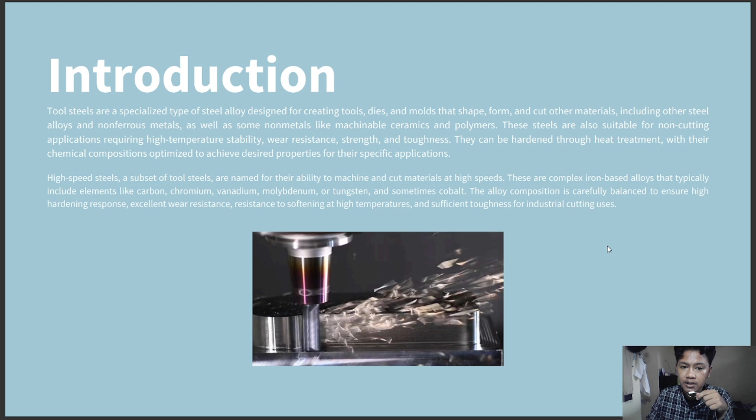High-speed steels, a subset of tool steels, are named for their ability to machine and cut materials at high speeds. These are complex iron-based alloys that typically include elements like carbon, chromium, vanadium, molybdenum, or tungsten, and sometimes cobalt. The alloy composition is carefully balanced to ensure high hardening response, excellent wear resistance, resistance to softening at high temperatures, and sufficient toughness for industrial cutting use.

The modern development of tool steels began with Benjamin Huntsman, a clockmaker from Sheffield, England, who in 1742 developed the crucible melting process. This innovation enabled the production of cast steels, with carbon levels between those of cast iron and wrought iron, allowing the steels to be hardened through heat treatment. By the early 1800s, these steels were the best available for cutting and machining other metals.

A significant advancement occurred with the Taylor-White steel, which could retain hardness at the high temperatures encountered during metal cutting, demonstrated at the Paris Exposition of 1900. This tungsten carbide alloy allowed for higher cutting speeds, feeds, and depth, making previous tool steels obsolete. This breakthrough spurred metallurgical research that led to the development of many advanced steel grades used in tooling worldwide.

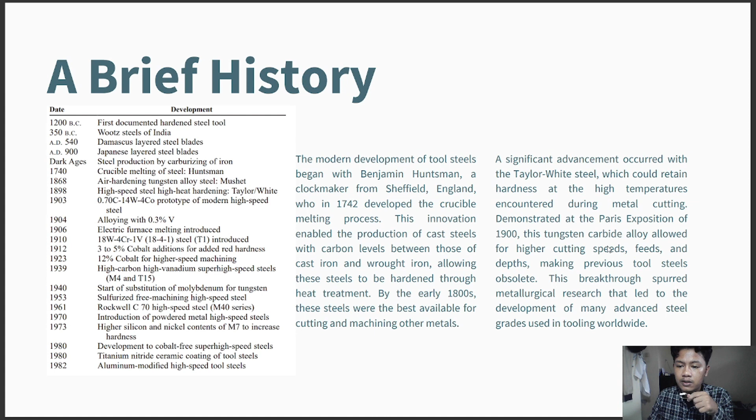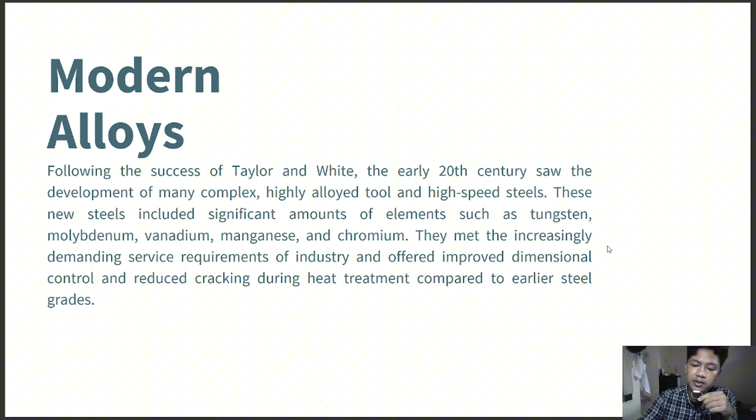Modern alloys. Following the success of Taylor and White, the early 20th century saw the development of many complex, highly alloyed tool and high-speed steels. These new steels included significant amounts of elements such as tungsten, molybdenum, vanadium, manganese, and chromium. They met the increasingly demanding service requirements of industry and offered improved dimensional control and reduced cracking during heat treatment compared to earlier steel grades.

First is tool steel properties. Modern tool steels are characterized by an exceptional combination of attainable hardness, red hardness, toughness, and wear resistance. Attainable hardness is the capability to reach a specific level of hardness through heat treatment. Red hardness, also referred to as hot hardness, is the capability to retain hardness at elevated temperatures. Toughness is the ability to resist breakage, chipping, and cracking under impact loading. Wear resistance is the ability to resist the effects of abrasion and erosion normally encountered by contact and interaction with an outside source.

2. Grade classifications. There are presently more than 40 classifications of high-speed and tool steel alloys according to the American Iron and Steel Institute, or AISI. For example, the AISI classification system designates that M-series high-speed steels contain molybdenum as the primary alloying element. In the T-series grades, tungsten is used as the primary alloying element.

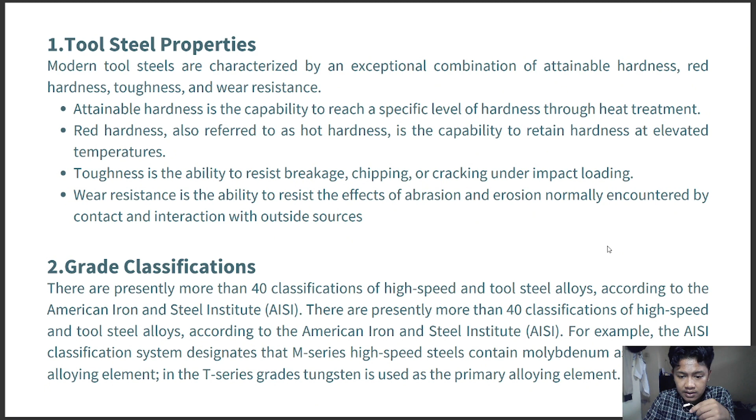3. Tool steels. Hot work tool steels. Many manufacturing operations involve punching, shearing, or forming of metal at high temperature. Hot work steels, Group H, have been developed to withstand the combinations of heat, pressure, and abrasion associated with such operations. Cold work tool steels.

Cold work tool steels, because they do not have the alloy content necessary to make them resistant to softening at elevated temperature, are restricted to applications that do not involve prolonged or repeated heating above 205 to 260 degrees Celsius. There are 3 categories of cold work steels: air hardening steels, also called Group A; high carbon, high chromium steels, also called Group D; and oil hardening steels, also called Group O.

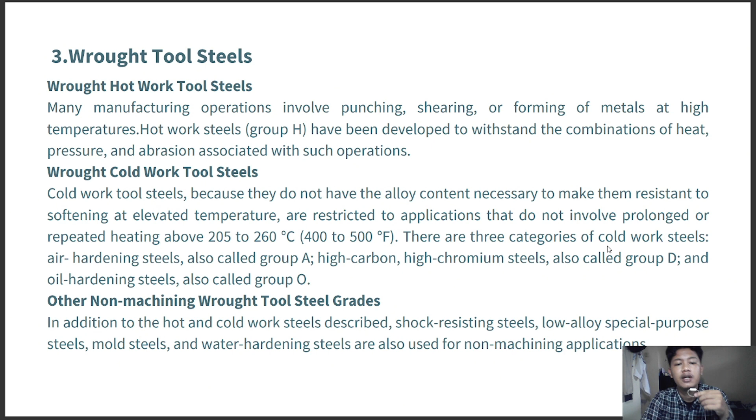Other non-machining tool steel grades, in addition to the hot and cold work steels described, shock-resisting steels, low-alloy special-purpose steels, mold steels, and water hardening steels are also used for non-machining applications.

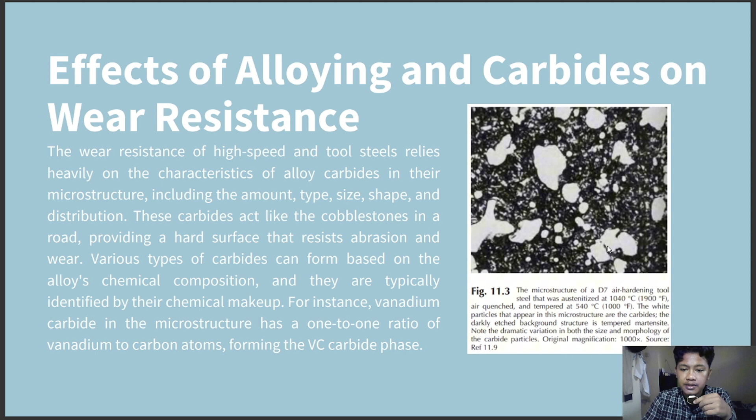Next, effect of alloying and carbides on wear resistance. The wear resistance of high-speed and tool steels relies heavily on the characteristics of alloy carbides in their microstructure, including the amount, type, size, shape, and distribution. These carbides act like the cobblestones in a road, providing a hard surface that resists abrasion and wear.

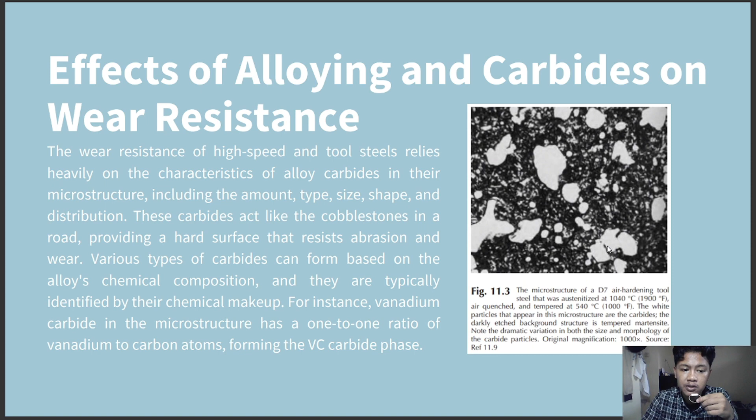Various types of carbides can form based on the alloy's chemical composition, and they are typically identified by their chemical makeup. For instance, vanadium carbide in the microstructure has a 1:1 ratio of vanadium to carbon atoms, forming the VC carbide phase.

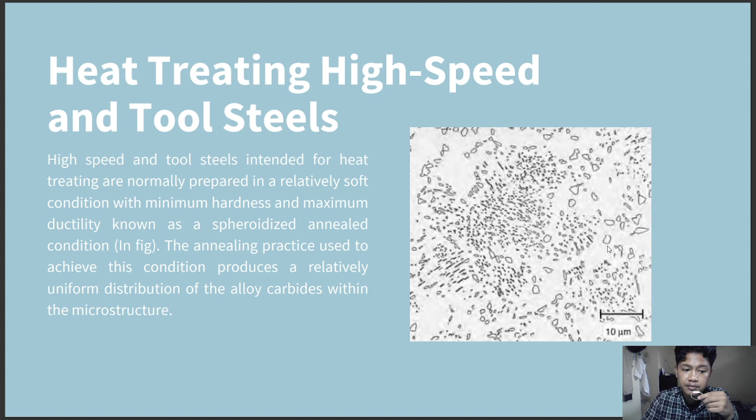Heat treating high-speed and tool steels. High-speed and tool steels intended for heat treating are normally prepared in a relatively soft condition with minimum hardness and maximum ductility, known as a spheroidized annealed condition. The annealing practice used to achieve this condition produces a relatively uniform distribution of the alloy carbides within the microstructure.

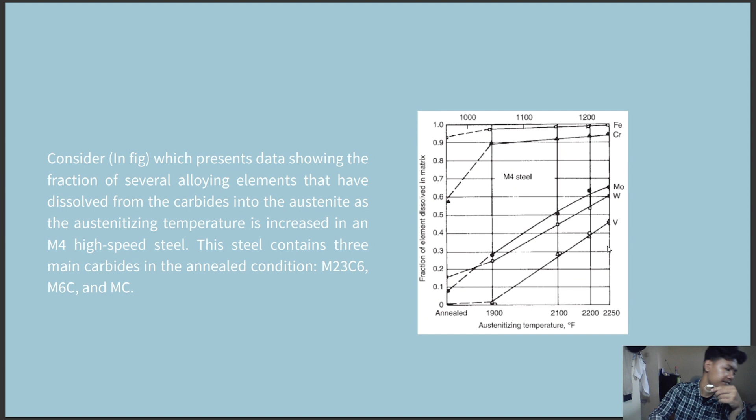The secondary hardening response that allows many high-speed steels to possess good red hardness is due to the precipitation of fine alloy carbides on tempering, like this picture. However, this precipitation process requires that the alloying elements have been dissolved back into the austenite during the austenitization step.

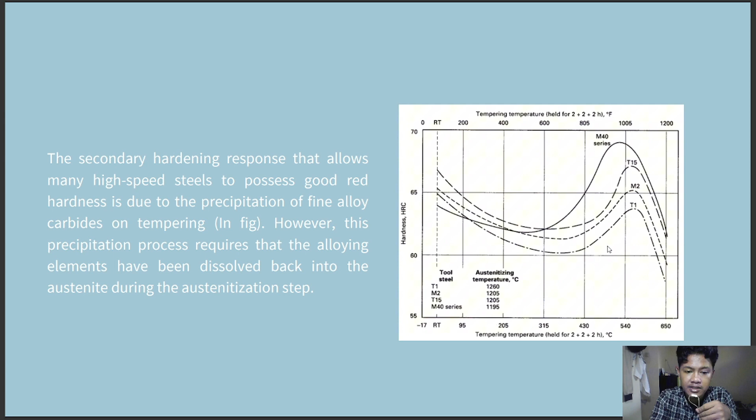Powder metallurgy tool steels. As a result of pronounced ingot segregation, conventional tool steels and high-speed steels can contain a somewhat coarse, non-uniform microstructure accompanied by relatively low transverse toughness properties. The carbide segregation observed in the longitudinal section of annealed M2 high-speed steel bars, like this picture, illustrates the degree of segregation that is normally present in these bars and how it becomes more pronounced as the diameter of the bar increases.

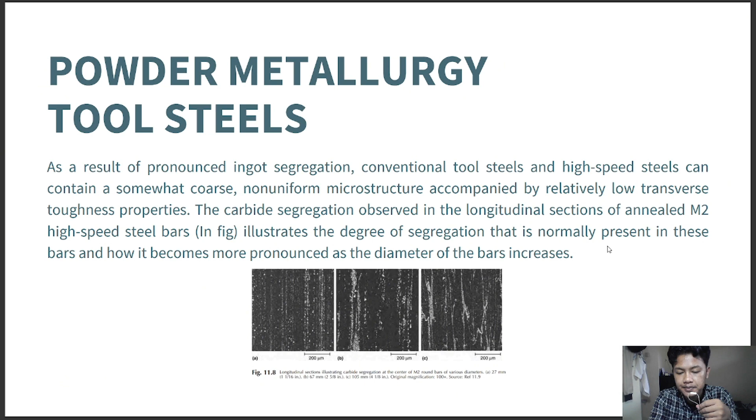Most tool steels are wrought products that are produced using traditional ingot casting techniques. An alternative process that is used to manufacture the same products is the rapid solidification of gas atomized powders that are consolidated to full density by hot isostatic pressing, or HIP. For example, the microstructure of a PM high-speed steel and a wrought high-speed steel are shown for comparison purposes.

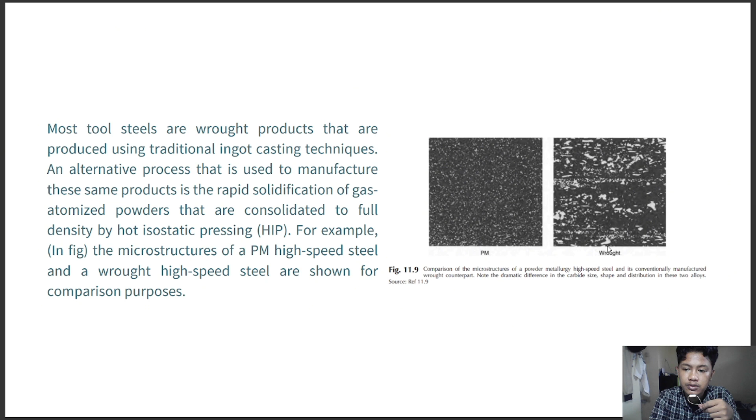Cutting tool coatings. In several cutting and machining applications used in industry, it is not uncommon to surface treat high-speed steels and tool steels with specialized coatings to reduce frictional contact, reduce thermal conductivity, and improve wear resistance. There are many surface treatments and treatment processes that are available. For example, it has been estimated that up to 60 to 70% of all carbide tools are now coated.